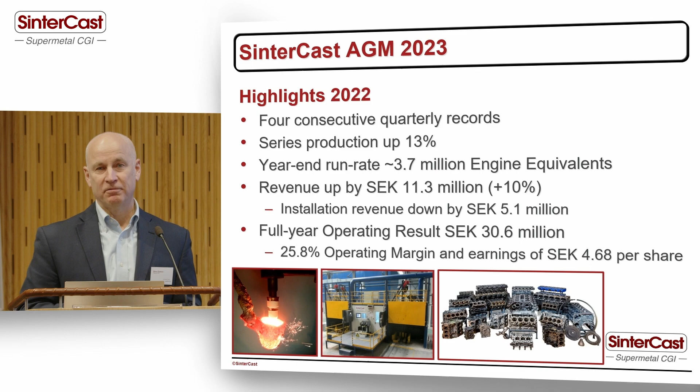The year could have been better. One year ago, in the second quarter of 2022, you'll recall that we took back the WHB system from the WHB foundry in Brazil. After a lot of patience and a lot of effort, we had to walk away from that business. That affected the operating result by 5 million. So I think without that one-time effect, it would have been more representative to say a profit of 35 million and an operating margin of about 30%.

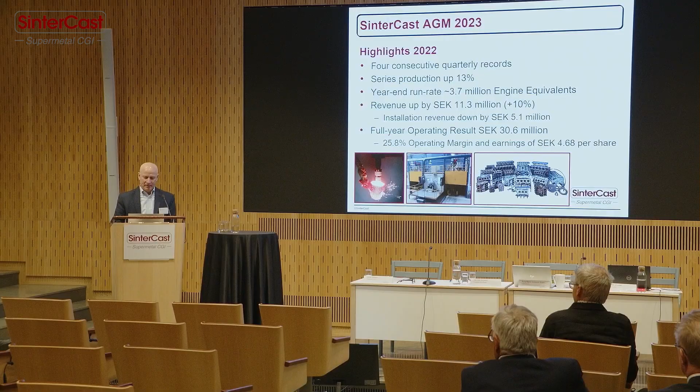So these are all good numbers, but for me, what I really measure is the series production, the engine equivalents. And at the end of the year, it was a disappointing finish for me. We had said that we would meet 4 million engine equivalents before the end of the year. We weren't able to do that. And I'd like to take some time to talk about why that happened.

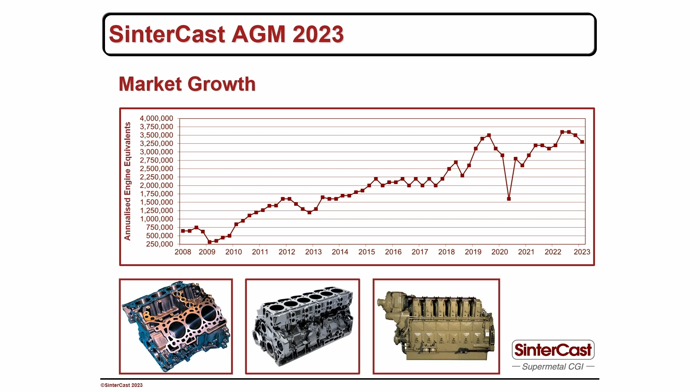Here we see a plot of the series production over the last 15 years. I always like to show it in a longer perspective so we can really understand the evolution of the company. In these 15 years, we had a compounded annual growth of 13%, exactly matching the year-on-year growth between 2021 and 2022. What we see is that there are a lot of bumps in the road. There's continuous improvement, but there are artifacts where production goes down. And we know the reason for each of them.

Back in 2008-9, of course, it was the economic crisis. In 2012-13, we had the stop of production of the Navistar 13-liter engine. It was about 20% of our volume when that production was stopped. New programs came on stream and we recovered.

From 2015 through 2018, we had a flat patch. The reason is simple: we didn't have new programs coming on stream during that period. There was no real change in the global economy, so we just ran flat. Then we had a couple of new programs coming on stream in 2017 and 2018, and of course the COVID in 2020.

I think that we've recovered really well from COVID. From a virus point of view, COVID is behind us. People don't even think about it anymore. But from an industry point of view, supply chains are still affected. We still feel the impact of COVID in many cases.

We came back at the end of '22 to an all-time high, but in the fourth quarter, production decreased, and to our disappointment, again in the first quarter, production decreased. I'd like to take some time to look at that in more detail.

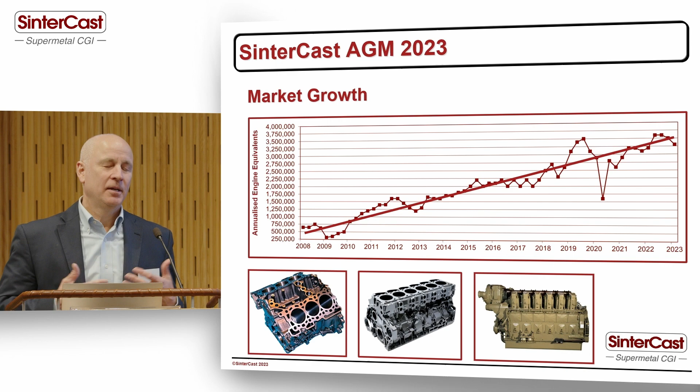Through that straight line, there are times when the volume is up and times when it's down, times when we're disappointed, times when we're happy. We're just in a bit of a flat patch at the moment, and that will come back. With this linear trajectory and 13% compounded annual growth over the last 15 years, I have every confidence that we make the 4 million engine equivalent milestone, every confidence we make the 5 million milestone, and there are opportunities to get to 7 million. At the moment, the development pipe is as strong as it's ever been.

We're working on a lot of new engines that will be launched in the lead up to Euro 7 emissions in 2027, and we're working on some new engines with a launch plan for 2030. So it looks really good in the pipe, and I'm absolutely confident that we get to 5 million and a lot of opportunity for growth beyond that.

As the series production grows, of course the revenue grows. It also has some bumps in the road. 2017 was a little bit low because we had a low year for installation revenue. 2019 was a little bit high because we had a record year for installation revenue. And then COVID in 2020, with a continuous recovery since then.

60 to 70% of our revenue is recurring revenue from software. 20 to 30% of our revenue is recurring from the sampling consumables that we have exclusive supply for. So I think sometimes we get grouped together with manufacturing companies because we work in this sector, but we're very much a software supplier and a service supplier.

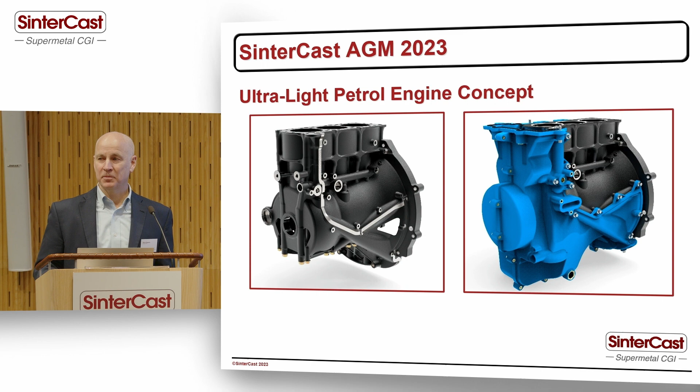Let's move on. About a year ago, together with Tupy and Ricardo Consulting Engineers in the UK, we introduced what we called the ultralight engine concept, where a CGI cylinder block would have the same weight as an aluminum cylinder block. You all saw it in the lobby before the meeting. Tupy has done a very good job of promoting this concept.

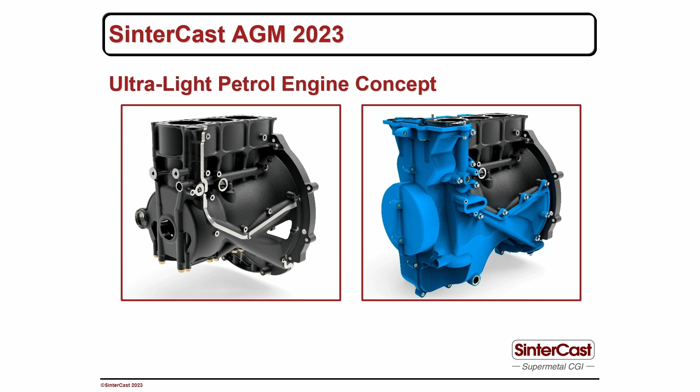We do have development programs underway. The way it works in the industry is that the OEM will allocate funds to make a development. At the end of the development, the team will present the engine to management, and the engine will then either be approved or not approved for production. But we have development programs underway. We're hopeful that they will be approved, and I think it can be a really interesting concept, either for engines that are internal combustion only, or as a range extender or supplemental power in a hybrid package. So it's a really interesting opportunity, and we look forward to following that over the next few years.

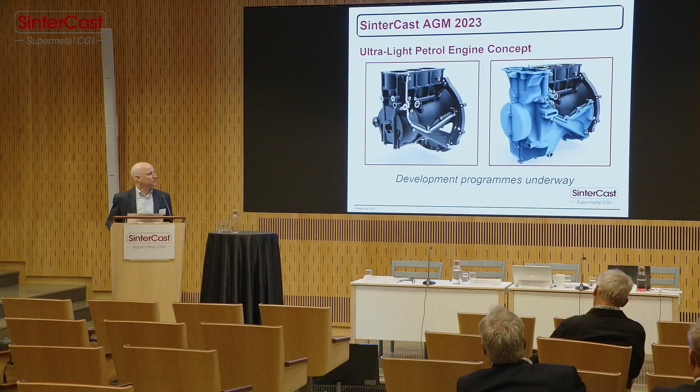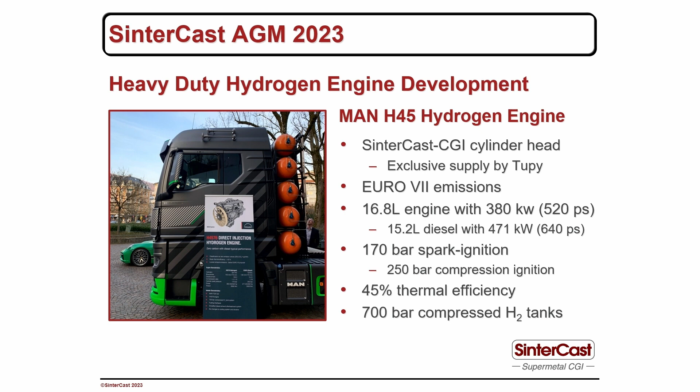We're also active in the development of hydrogen heavy-duty engines. This is an engine that was introduced at the engine conference in Baden-Baden in Germany at the end of February. It's from MAN. Tupy has the exclusive supply of the cylinder head for this program, produced in CGI with our technology. The engine satisfies Euro 7 emissions, coming in 2027. Of course it has no CO2 emissions because it's a hydrogen engine, but it satisfies Euro 7 for NOx emissions and also for particulates. It's based on the D38 engine of MAN, which is a 15.2-liter diesel.

They increase the cylinder bore to get more displacement for the hydrogen engine because hydrogen doesn't quite have the energy density of diesel. So it's a 16.8-liter engine. You see that it has 380 kilowatts of power.

I frequently talk about the peak firing pressure in the engine, how hard you squeeze the fuel to make it combust. The harder you squeeze, the more power you get. Instead of squeezing hard like we do in a diesel, this concept squeezes to 170 bar and uses a spark plug to start the ignition.

You hear a lot about hydrogen engines nowadays. All of the hydrogen engines being introduced to the market today are spark ignition. Because of the lower pressure, we have 45% thermal efficiency, and you will soon see trucks on the road with hydrogen tanks similar to this behind the cab.

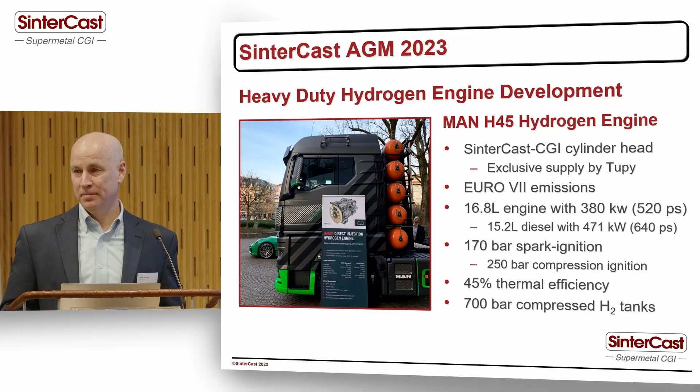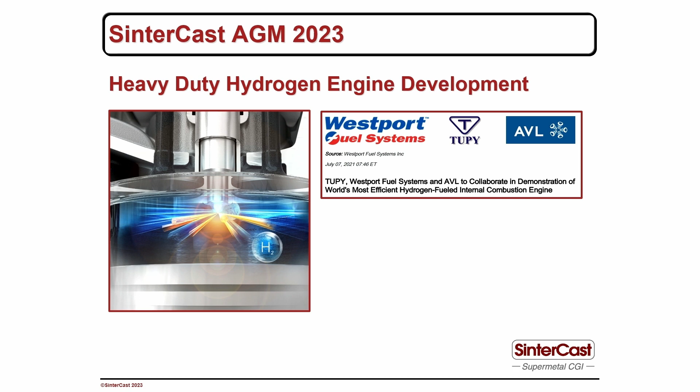But we want to go to the next step. Last year, I introduced a new project being conducted by Tupy, together with Westport, the fuel injection people, and with AVL, the engine design consulting firm based in Austria. I'm very flattered that Tupy has appointed me to serve on the advisory board of this group, along with 9 other people appointed by either Westport or AVL.

I'm happy to report that the first engine is now in operation on a test bench. The goal, instead of using a spark now, is to squeeze really hard, also with hydrogen, to get high thermal efficiency above 50%, to get higher power, so the power will be the same as in a diesel engine package, and we'll have the range of a diesel engine, and all of the benefits.

We can use the existing production facilities for the engine, the maintenance facilities. You may not know, but fuel cells require a very pure hydrogen supply, but the internal combustion engine can tolerate lower purity supply. So that is an advantage from the infrastructure side.

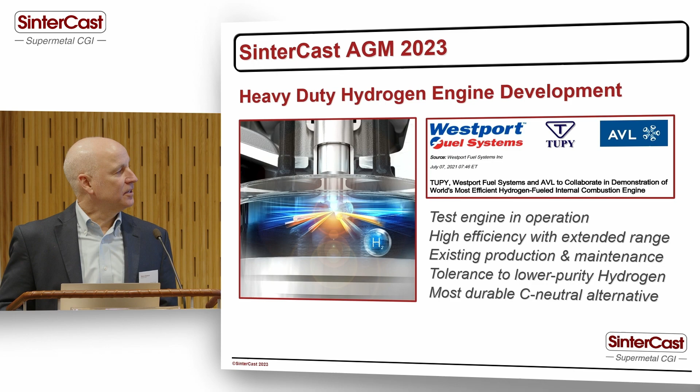Together, the partners in the project believe that this will be the most durable carbon neutral alternative compared to batteries, compared to fuel cells, and even compared to diesel engines running on renewable diesel fuel. So really promising development and something that the entire industry is following.

Let's start to wrap up. We'll talk a little bit about our climate contribution. Many of you have seen this before. It's in the sustainability section on our website. But we can break down our contribution to carbon reduction.

We have a very big role to play because our engines are more fuel efficient than alternatives. Typically for a new engine, where we use SinterCast CGI for both the cylinder block and head, the fuel savings will be about 8%.

A truck of that size normally runs about 120,000 kilometers per year. It consumes around 27 liters of fuel per 100 kilometers. That means that we save 2,500 liters of fuel. Every liter of fuel generates 2.5 kilograms of CO2. So that translates to 6,250 kilograms of CO2 saved.

Today we're supporting the production of between 150 and 175,000 trucks. Multiply that out, it's a contribution of about 1 million tons of CO2 per year. That number is based on us claiming credit for only 3 of the 8% fuel efficiency improvement. We say that the remaining 5 can come from the other good things that the OEM has done, like reducing rolling resistance, reducing aerodynamic resistance, improved transmissions, and so on. So we only took 3% credit.

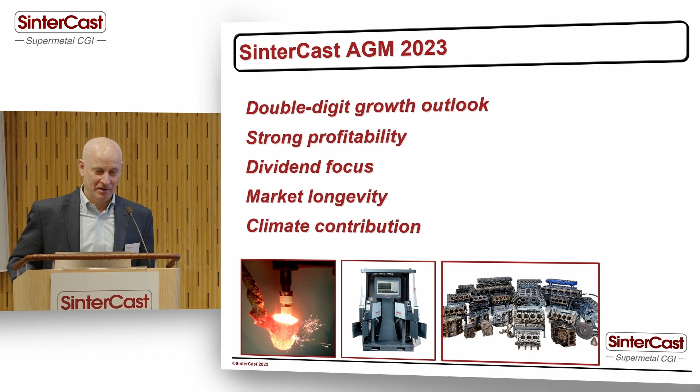We will maintain our dividend focus with the ambition to become dividend aristocrats with 25 consecutive years of increasing dividend. We're more than halfway there, which is great. I'm absolutely comfortable with the longevity of our market. More than 90% of our production is in big things, which is not directly or immediately threatened by all of the discussion we hear in the market about electrification. And we make a really significant contribution to the climate and to CO2.

I think there has been a lot of discussion that is negative about our industry, but we've done so much. SinterCast was founded in the 1980s. If you compare a truck today and the emissions from a heavy-duty truck, you would need 60 trucks today to make the same emissions as a truck that was produced in 1990. We're saving 8 million tons of CO2. There's this discussion about our children wanting us to start earlier. I think we did start early. I think we were doing it before most of the rest of them. Thank you.